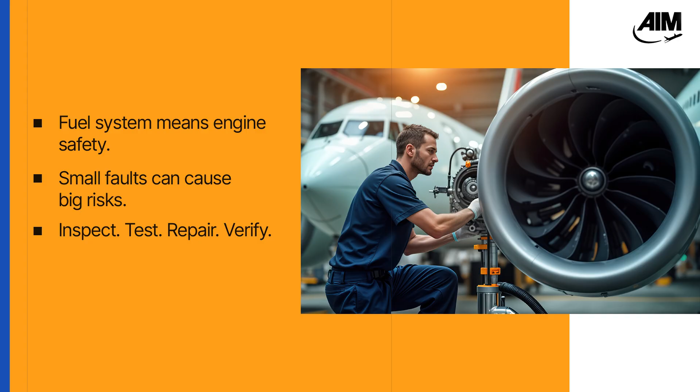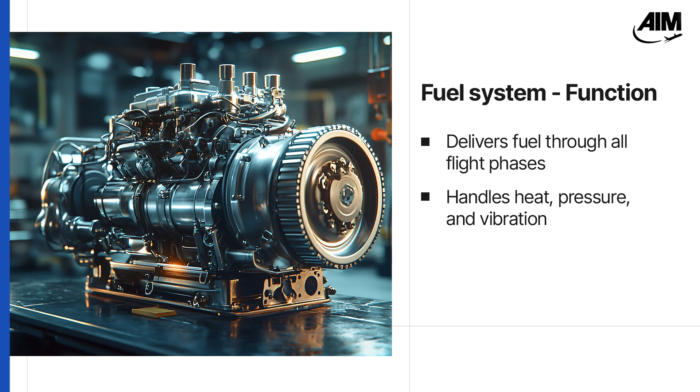Before starting the inspection, take a moment to understand what the fuel system is meant to do. It stores and delivers fuel in every phase of flight, including takeoff, climb, cruise, and landing. Because of heat, pressure, and vibration, each part must be secure, sealed, and working as intended.

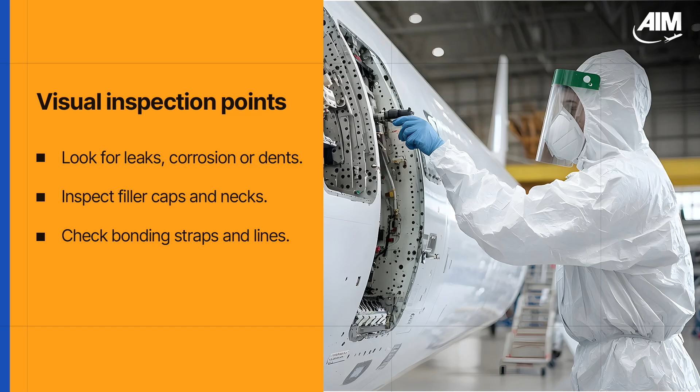To start the inspection, begin with a full visual check of the fuel system. Look for any signs of leaks, corrosion, dents, or looseness. Pay close attention to filler caps, filler necks, bonding straps, fuel lines, and the tank surface. Make sure everything is secure, clean, and free from visible damage.

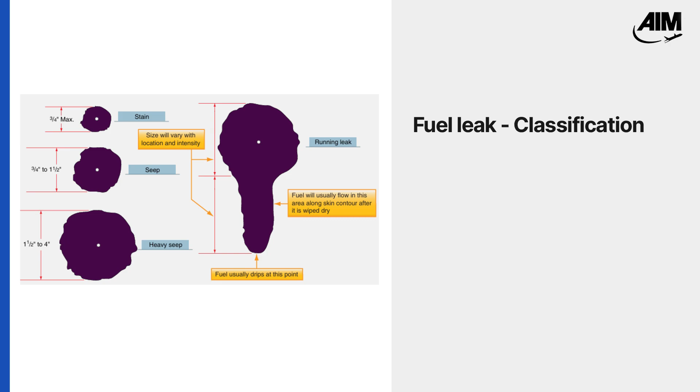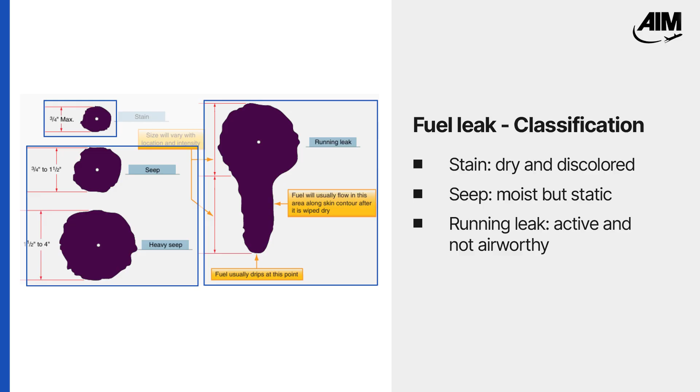As you inspect each surface, keep an eye out for any signs of leaking fuel. Not all leaks are the same. You may find a stain, a light seep, or an active leak. A stain is dry and discolored. A seep looks moist but stays in place. A running leak drips or flows and is never airworthy. Document what you see and tag the area if repair is needed.

Once the visual inspection is complete, perform functional checks on the system. Move the fuel selector through all positions and watch for smooth operation. Check the accuracy of fuel quantity gauges and low fuel warning systems. Drain fuel from sump points using a fuel tester and inspect for water, debris, or discoloration. If contamination is found, keep draining until the sample is clean.

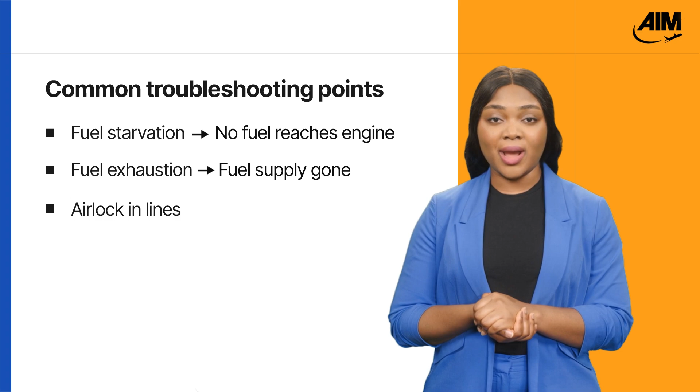If the fuel system shows abnormal behavior, begin by identifying the root cause. Fuel starvation means no fuel is reaching the engine, even if fuel is on board. Fuel exhaustion means the fuel supply is gone. Also, check for airlocks in the lines, clogged filters, blocked vents, or faulty valves. Each of these can interrupt fuel flow or give misleading readings.

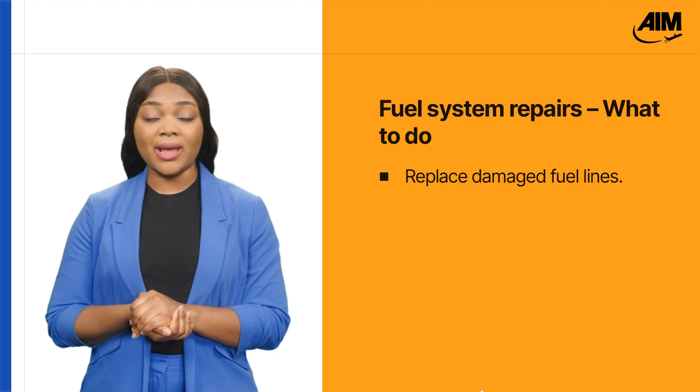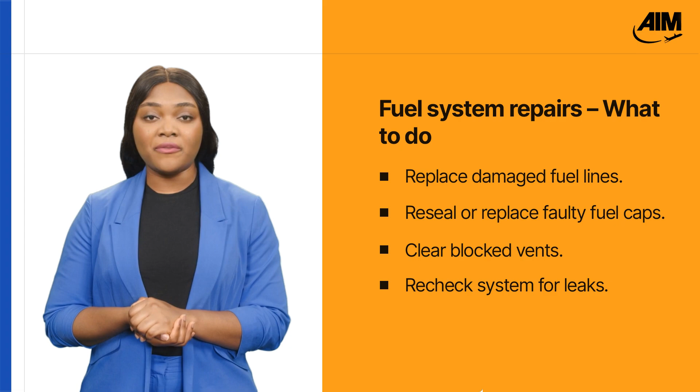Once the fault is identified, carry out the appropriate repair. Replace any leaking or cracked fuel lines using approved clamps and sealants. If the filler cap is damaged or not sealing, install a new cap or replace the gasket. Blocked vents must be cleared carefully to restore airflow. After every repair, recheck the system and verify that the leak or fault is fully resolved.

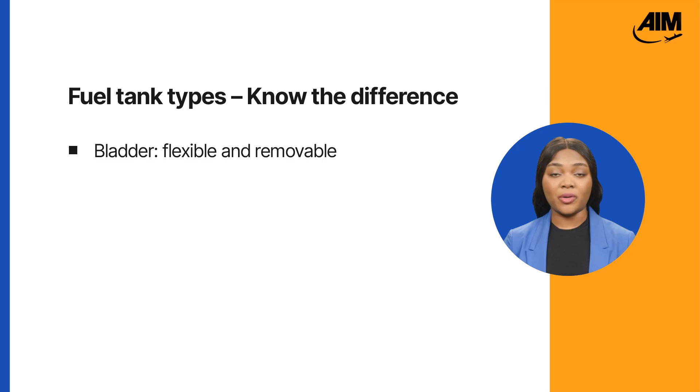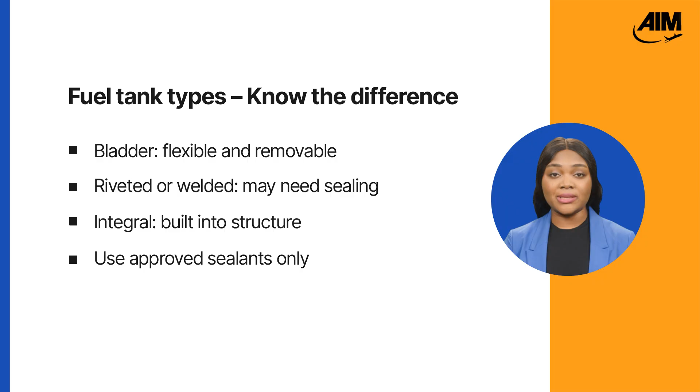Before making a repair, know the type of tank you're working on. Bladder tanks are flexible and removable. Riveted or welded tanks may need internal cleaning and sealing. Integral tanks are part of the airframe and require sealing from inside. Always use approved sealants and follow the correct procedure for each type.

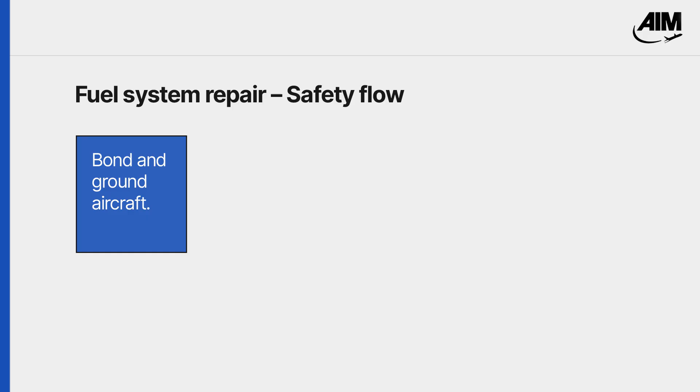Before working on any part of the fuel system, take proper safety precautions. Bond and ground the aircraft before starting work. Use non-sparking tools and wear protective equipment. If the tank has been drained, ventilate it fully before entry. Fuel vapors are flammable. Work carefully and never rush safety steps.

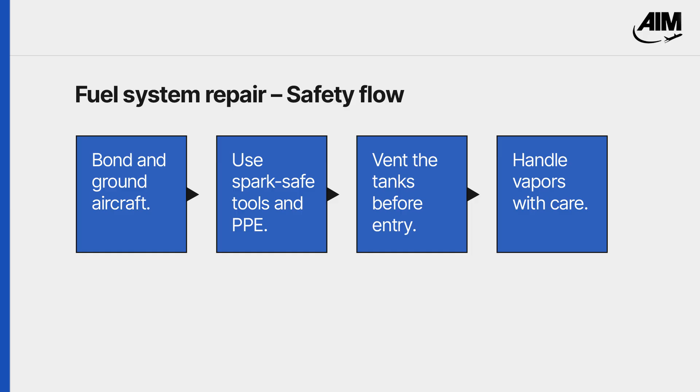After making any repair, inspect the system one more time. Check all connections, run a sump drain test, and inspect the fuel tank for any leftover debris from the repair. Verify that no leaks remain. Fuel system work is never complete until the problem is fixed, the system is clean, and your documentation is clear. Reliable repairs start and end with careful inspection.